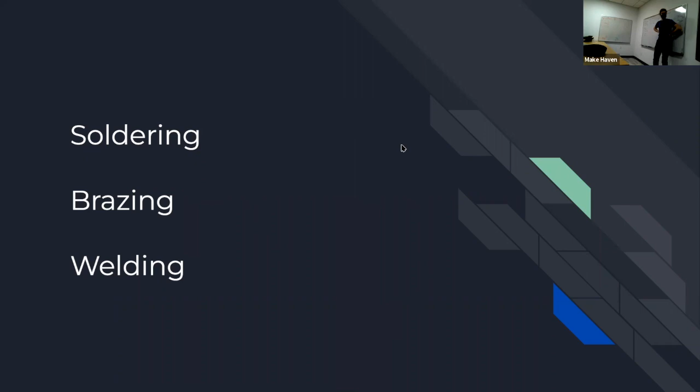Items are joined together by melting and putting together a filler metal, which is the solder, spelled like soldier, solder—it's a weird word. Putting that melted metal into a joint, a connection between two base metals that do not themselves melt at all. So when you're soldering, you're putting a metal glue between two pieces of metal that don't change. That's what soldering is.

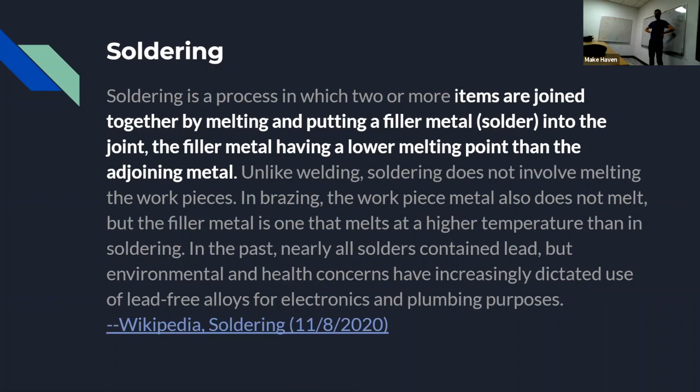It can happen for a lot of different purposes, a lot of different things. You might solder pipes—you might have heard people talk about soldering or sweating a pipe together. We'll see that that's sort of in the borderlands, maybe almost for some pipes.

A lot of it that we're going to talk about is soldering for jewelry. So this is perhaps the most relevant type of soldering for what we'd be up to this week—soldering jewelry like you might see here. If you've got some bands, these are fire bricks, a little tiny torch, and then some soldering rod. You can also solder together chain links and other different things.

But soldering also applies to electronics up here. And so spiritually, these are all really similar in that you have a base material that you don't want to have melt at all, and then you put molten metal in between to make some sort of connection.

My brain, that is coming from my physics background, is thinking about soldering like this every single time, just because of electronics. And in that case, you really don't want your base material to melt because it's like a transistor that you need to have operational. So you don't want your base things to melt at all.

Whereas in jewelry, sometimes it can be okay for the pieces to be a little melty, like they won't break if they melt a little. But usually they're very precious metals and you don't want them to discolor, or there's some reason why you want them to stay exactly as they are. So soldering is a great purpose for that.

This is the coolest of the processes that we're going to look at, as in actual temperature. The soldering irons for electronics downstairs, I was just looking at them—they're only 700 degrees Fahrenheit, which is hot.

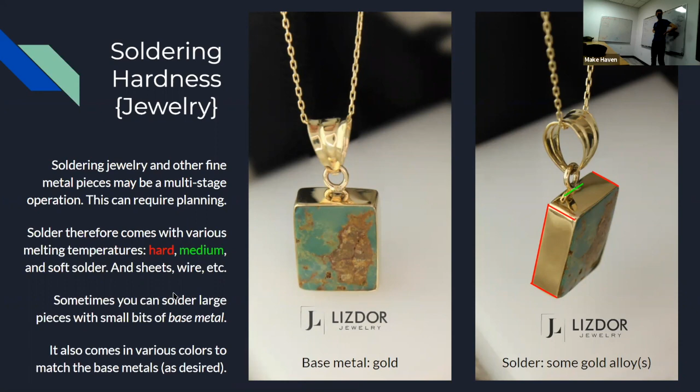I made a little message channel for a few people who had expressed interest, and Lior said, like, then 2 days later, oh I just started making the video for it right now. Part came in. So if you want to make metal castings, it is now possible. It's really cool, and it's a copper part, so he did it with molten copper, which is really cool.

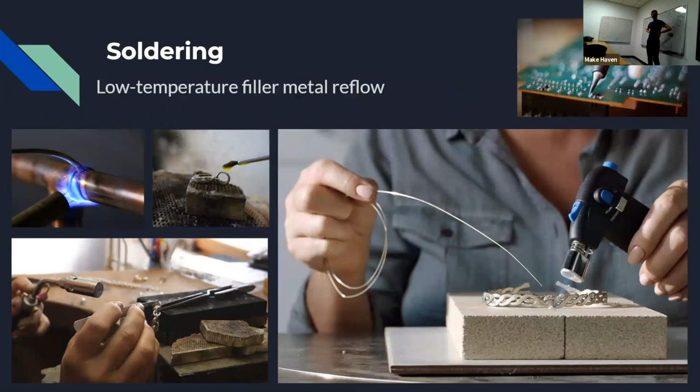Metal items are joined together by melting and flowing a filler metal, so really similar. The filler metal still has a lower melting point, but usually there's a flux, and you're getting really close to the melting point of the base metal. So the base metal may melt a little bit too, but you're really, really close. This is something you can consider.

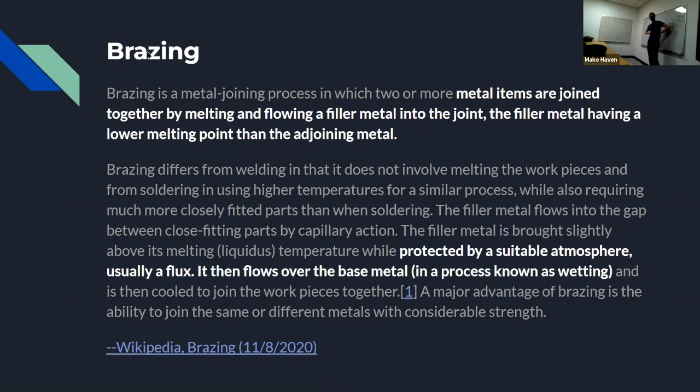Copper is sort of on the border for melting points, but brazing is often used with aluminum tubing. Aluminum can be brazed pretty easily in a garage at home with a torch. Aluminum has a lower melting point overall, so you can get aluminum brazing sticks pretty commonly at a Home Depot or Lowe's, and then you can get things to go together.

Brazing is also really easily done on a conveyor belt, so it's not an uncommon manufacturing process where you can have a filler metal flow between two pieces, as opposed to big robotic welders with a giant robot arm laying a weld. You can pass it through a really hot oven controlled for temperature, just below melting the base metal and just above melting the brazing metal.

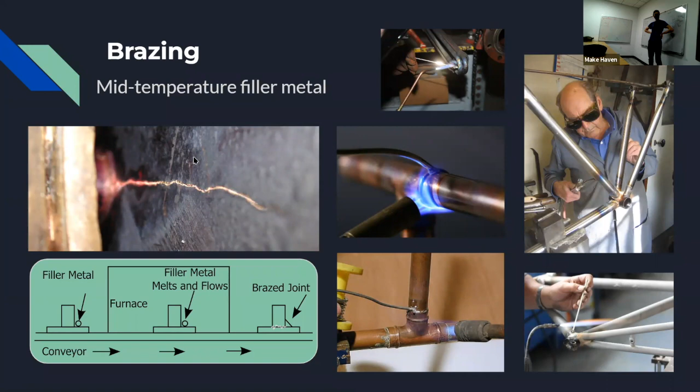between soldering and the next one, which is welding. Welding is the one that has the highest heat. It melts parts together, allows them to cool and fuse, sometimes with a filler metal and sometimes not, but it always requires melting of the base material.

So when you're welding things, if you weld two pieces of steel together, not only might you have some filler if you use MIG, you're also going to melt the steel that's there. All of those are true. And if you do oxyacetylene or forge welding, you may actually make a weld without needing any filler material—they're just so hot that they fuse together.

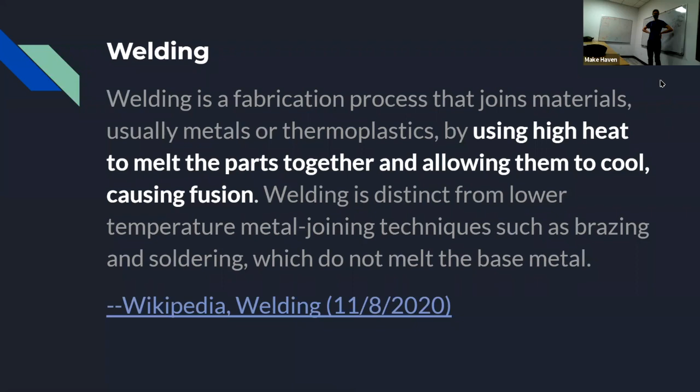You were trying to forge weld just a bit ago. Yeah? Should have brought my first attempt, it's probably still pretty toasty, I would guess. Later, I quenched it. I accidentally melted steel earlier, which isn't something I've ever been able to say before.

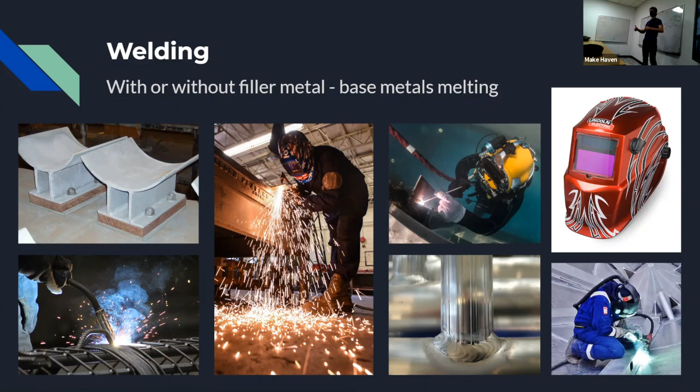Is there a start with MIG and you graduate upwards, or can you go straight to TIG welding? Is it better to?

MIG is by far the easiest because you just press the button and it happens, like a hot glue gun. Yeah, I just don't think well, and it's not... so you're asking good questions.

There's a whole range of different types of welding. There's MIG, where it comes out of the gun, it's a hot glue gun.

Then TIG, where there's a TIG cup where you hold a thing that makes an electrical arc to what you're trying to weld, and at the same time, in another hand, you're pushing in the filler material. So for TIG welding, you have things to do in both hands, so it's a little more complicated.

Pedal the control, a foot pedal often. Although I think ours has a finger button, so you have two hands and a button to manage all at once.

So that's a step up. And then there's oxyacetylene, which is just oxygen and acetylene, 2000 degrees of fire that you point right at the thing. You may want to put a filler in, but that's hot enough for most metals that you can just melt them until they're melted together.

And that works fine. It's also a good way to cut through the metal if you just want to sort of melt them enough that you can make a cut.

I think it's one of those where there are people who will only do hand woodworking, and there will be people who say if you can't oxyacetylene, what are you doing? So it falls into that same sort of camp.

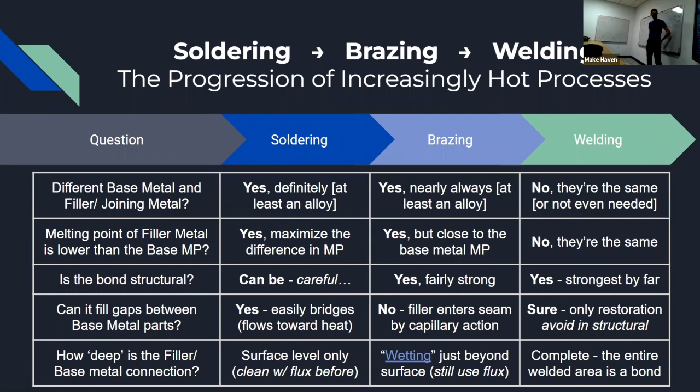There's some subtlety, but the simplest way to think about it is soldering and brazing have a fair amount of overlap, but those are sort of lower temperature and they both require a filler. Welding is hotter and more, it's the only one that melts the base material, so it's sort of separate from the other two.

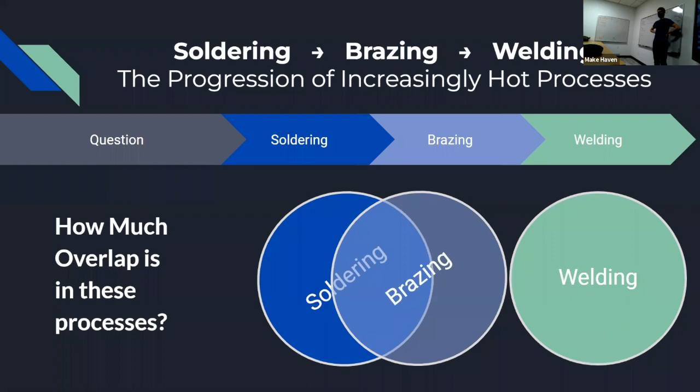But making a chain is another thing you can actually do. It takes some skill, but I watched Lisa, the facilitator, just manifest a chain right there in front of me.

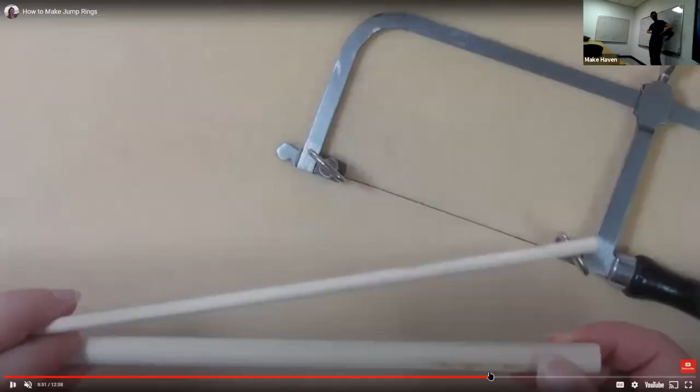There are a lot of different ways you could do this, but it's really possible to do even with just a stick of wood. You can do this without needing the jewelry shop at all, but it's really nice to be able to use some of those tools, even if you just grab a saw.

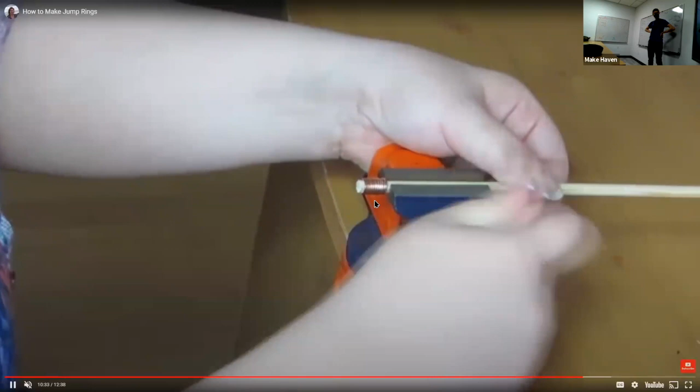Oh, and this is the process I saw Lisa do. You just take a coil, push it near the end of a dowel, and then cut at an angle, so you're really just cutting it in half, and that gives you your jump ring. So if you wanted to make chains like this, it's pretty approachable to do. It's a very 'you can make it happen' sort of thing.

A big chunky chain can be a lot of fun. This is one of four videos that cover these processes.

You can do all different kinds of chain lengths. You can do these fancy loop and loop chains, or you can do wrapped wire techniques, which can be a really fun thing to pound into a wood piece.

This is as easy as taking a wire, putting it in a drill, and spinning it, which makes it straighter, which is kind of bizarre. Then you take two wires and put them in the drill and spin those, and they twist usually in a really nice progression.

Although they found a way to make like an 8-minute video about it — it's, you know, YouTube content. But in any case, making jewelry like that is really fun and approachable, so I'd recommend those videos if you're interested.

Tempering is a cool process. In Slack, in the Foundations channel, I shared my video feed on YouTube, the kind of thing I watch when I get home and sit on the couch for ten minutes before getting up to make dinner. Today it was this Old Tony video, 'You'll Shoot Your Eye Out Kid,' where he goes through the tempering process, showing how you temper different music wire and different materials. So if you want to see tempering and annealing, it's a really fun way to see it.

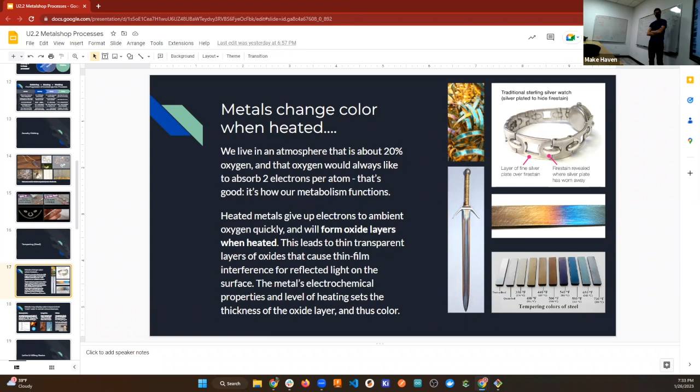It's an interesting dynamic in metals, but probably most of us won't be too deep in those weeds. But it's good to know, good to look at. And if you happen to be doing something where you make metal chips like this, you can get real fun colors and you can tell the temperature they were at as a result.

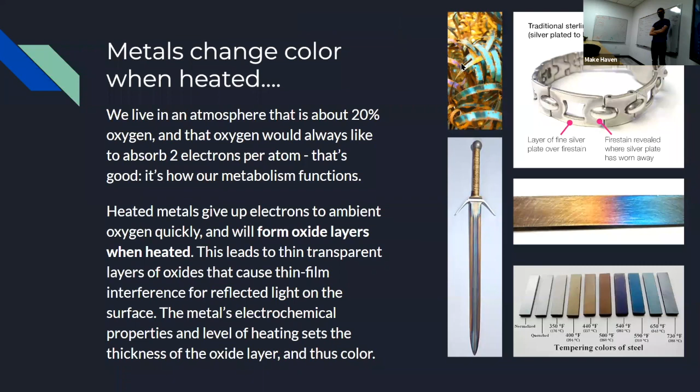So there's a bunch of reasons why metals have colors, and I want to say these out loud more than anything. The first one: if you get a metal glowing hot, that's something called black body radiation. It's a fascinating science phenomenon where things get so hot they'll just start glowing. And it turns out, in case you wanted to know, the sun is an example.

The sun is not on fire. It's a big glowing hot ball of gas, in case you wanted an astronomy lesson to go along with it. In order to be a fireball, it would need to have oxygen so that it was burning. Instead, it's just glowing hot hydrogen and helium, glowing white hot, which is its own whole crazy story.

But in the metal shop, you probably won't see it until you weld something. And then when you finish the weld and pull the goggles up just a little too early, it'll still be sort of glowing orange, red. And as it cools off, it'll stop glowing. So metals can glow when they get really hot.

You were using the induction forge, doing some forging. There's a shield that you want to wear that's I think tint 3. There's tints to protect your eyes of various grades. So welding will be like tint 12, and this is just 3 to take the edge off because it gets so bright.

Before I put the shield on earlier today, I was getting the spot in my vision, like if you glance up at the sun. Which can be bad for your eyes over time. So that's an interesting thing.

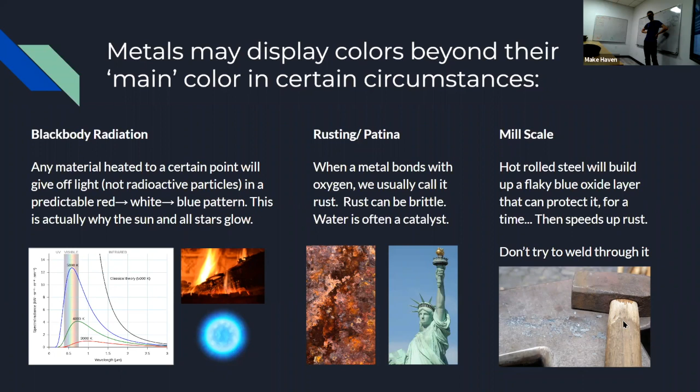Mill scale is a thing - if you're getting hot rolled steel, you might know if you're getting into that, it's got this bluish appearance on it. Or if you put it into a forge and get it hot, it'll form on the surface. If steel gets really hot, you get these blue, solid, multiple-layer thick oxide layers. A blacksmith is where you'll see a lot of this. If you go look at our anvil in the metal shop, there's some mill scale near it, but it protects the surface. A lot of times, like the steel mills I used to live near in Cleveland, you would see the metal with mill scale on it, because it does prevent rusting until you knock it off, and then it just starts to rust like mad. But it's a really good way to work - you just don't want to weld through it, it's not good for that. If you start working with the anvil and forge, you're going to totally notice mill scale, and that's just part of how it works. It's a light blue color.

This is where things like the screw got defined. They did exist before, but shortly thereafter they were standardized pretty quickly, and that let us have more precision in what we build. We're in New England, you can see lots of old wonky houses built in all sorts of ways that look crooked and bent and strange, which is fun. Those were built without as much precision as something like the lathe would bring. Construction now has much more precision baked into it, so a house built in the 80s or 90s won't be nearly as whopper-jawed as one built in the 1700s. That's an expression of the amount of precision we've had in our tools and how well we can build things to a higher quality now.

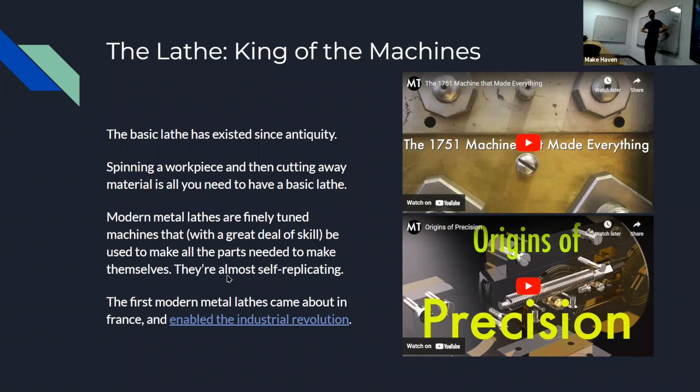You can use them for lots of purposes: to put threads on things, to make different size spindles. But basically, the lathe is all about spinning materials. Using this tool is a lot of fun, and you can make a whole lot of things with it. But there is a very long class for it.

And then with the big knobs and dials on the front, you can move this thing around and it'll make the cuts for you, because the forces on it are so extreme. You do not want to be holding the thing in case something goes wrong. So the metal lathe is a really useful tool if you want to make stuff.

Taking that and sort of spinning it up on its end is the Bridgeport. The Bridgeport machine—here's one of our two that we have. Instead of spinning the workpiece, they spin the cutter. So the cutting tool is a spinning piece, and there's a whole range of what those cutters might be or look like.

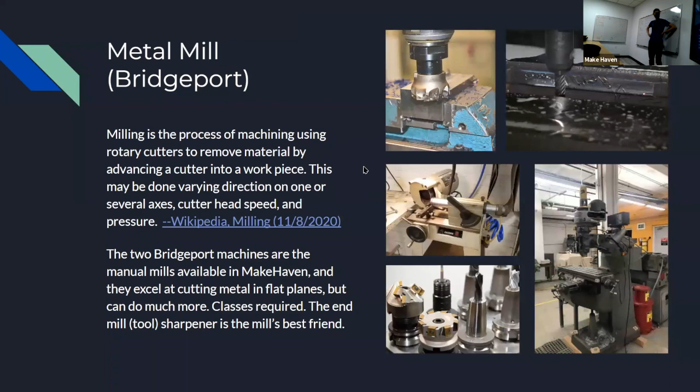One thing about them though, if you're running a machine shop, is you can make a whole lot of stuff. Like, here's an end mill sharpener. If you get really into it and you want to keep making things and your end mills get dull, you can sharpen them back up again. But this is useful to look at just to sort of see.

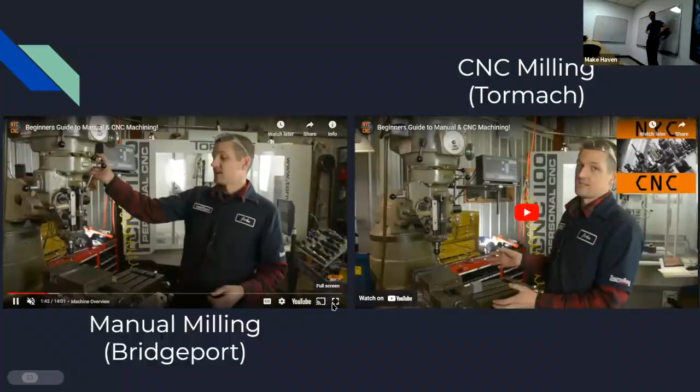I'm just going to show this muted—this is the same video twice. I would really recommend this one. We'll do this full screen. Here's sort of the Bridgeport doing its thing.

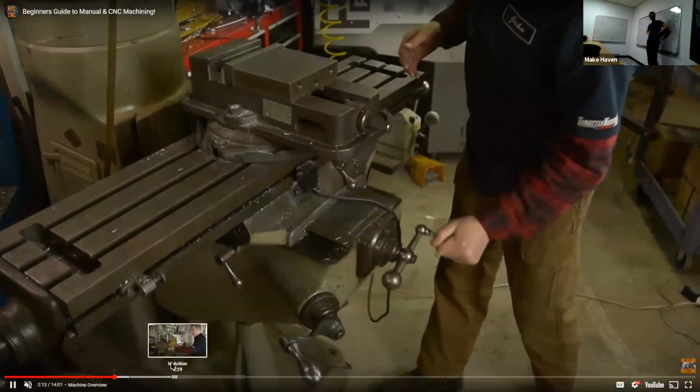You can see it looks a lot like a drill press. There's this quill, you move up and down. Here's the cutter, and as you go through, a few knobs will move things around. So instead of the drill press where you have to manually put the piece of wood where you want and then drill, the milling machine or the Bridgeport lets you manually move it around with knobs and wheels so that you can control it.

And up here, this thing that's not turned on for him is a digital readout, so you can see exactly—and it's measuring as you do it—where is it located, how's it positioned. If you get really good at using one of these DROs, you can be very precise with one of these machines. Prior to the CNC revolution, which happened somewhere in the 50s when they started turning up, people just got very good at building these things.

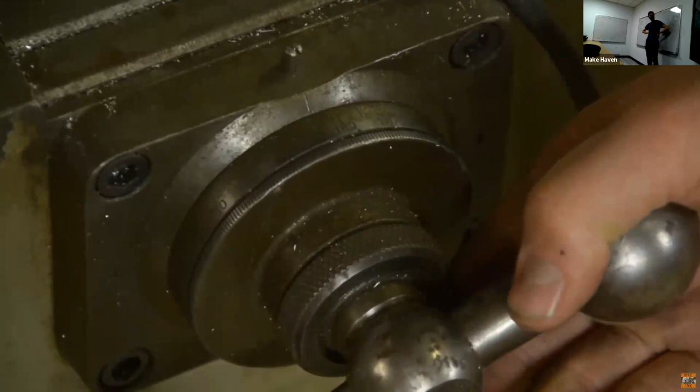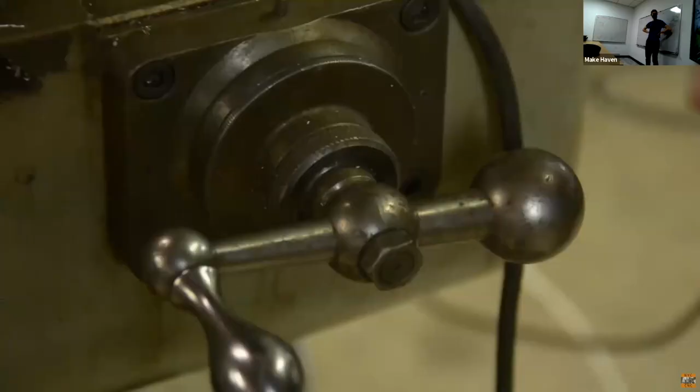So in World War II, this is how metal parts were made. Most often, people just learned how to do this, and they would be able to crank things out of these sorts of machines, building all sorts of stuff. And yeah, they're Bridgeport, like Bridgeport, Connecticut, where they were made, which is kind of fun. So there's all sorts of different ways that you can do it—you can see here, here's the DRO.

It's able to read with great precision based on the movements you make on the inputs, so you can make really accurate motions with these. It's definitely a skill to learn over time. It's not something you can hop in and know how to program. You've got to learn some of the details of how to do it.

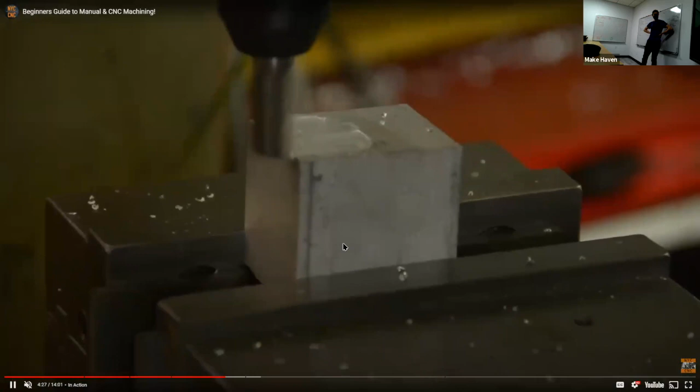You can see it's just slicing through that piece of metal. That end mill is able to make cuts and get really good detailed cuts through pieces of metal that other machines would struggle to do. But it's kind of fun to watch.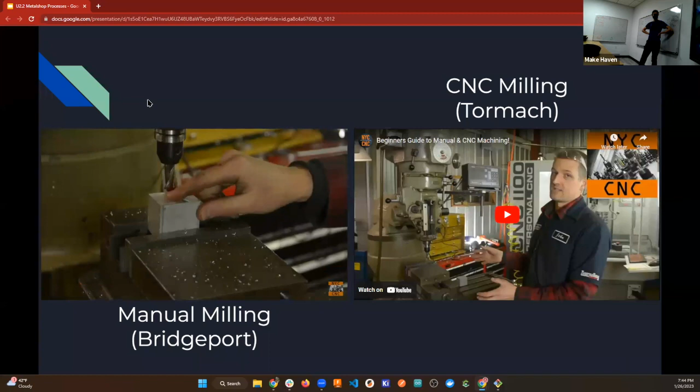I would doubt it, I think, but maybe. Are you going to Google it? Oh, thank you.

This is just where they're manufactured, like Toledo, Ohio, close to where I grew up. They're famous for scales, I think they just made good ones. They didn't invent the scale, but every country has their own famous brands of them. I think a Maho is a Swiss made one, maybe. There's different brands from different countries, and they're very proud of those heritages.

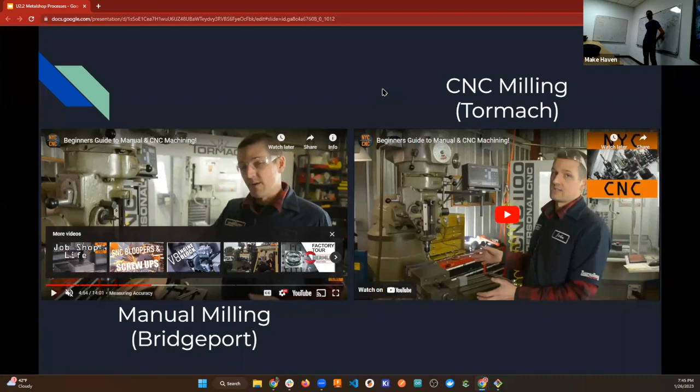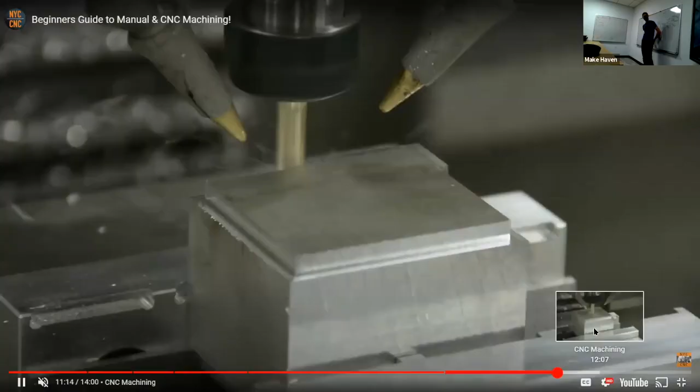The CNC is sort of the spiritual successor. So you'll see in this half of the video that a lot of what's going on feels the same. There's a vise, there's a table that moves around, and it's doing basically the same job.

The difference is that this is controlled by a computer. So instead of you needing to be good at turning those dials, look at how fast it made that turn without a pause. This is now controlled by a machine, and you can get very precise things, like this little spiral down into the metal. That would be just about impossible to do on a Bridgeport. You'd have to be moving things with three hands at once to do a downward helical spiral.

Fun fact: the milling machine was created by Eli Whitney in New Haven. And then the Bridgeport, specifically the Bridgeport Metal Goods Manufacturing Company, was organized in Bridgeport in 1909 by a Danish immigrant. Just saying how much I love the Danes.

So in what situations would you want regular hand Bridgeporting versus the CNC? Basically nowadays there's a lot of stuff you can only do on CNC. Like Corey was saying, doing a downward helix into a piece, you really can't move two axes at the same time with any precision on a Bridgeport. So making cool shapes with curves is really something you can only do with the CNC.

That being said, I think a lot of machine shops still will have a manual Bridgeport and a lathe, because if you just need to size a piece of metal, a lot of the time you need to do one cut to make this thing flat. A Bridgeport is a quicker way to do that than setting up on a CNC machine a lot of the time. And I think industry has really moved towards a machine shop being a whole room full of CNC machines big enough to walk into.

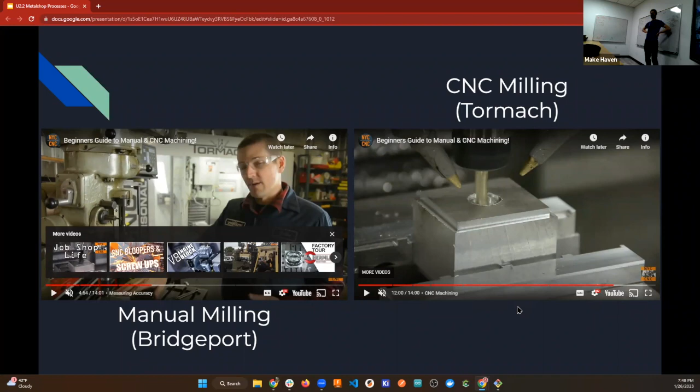And especially living in Connecticut, you should be able to find a used Bridgeport if you're really looking for one. I believe we have one for sale. Yeah, we do actually. Yeah, we have three. Third one is, yeah. So if you wanted to get one, you can, I know a guy. It's Leor. That's the guy.

Would you want to switch out the drill for different materials, like steel versus wood?

That's a great question. We have 3 active CNC machines here. There's 2 in the wood shop, the Shapeoko and the Gerber, and those are for wood. There's also the embroidery CNC, but that's a different beast. So 2 in the wood shop, and then the metal Tormach one is really more for metal.

Acrylic you can cut on the wood one. The metal one, the Tormach, has a capacity of 8 inches. It's not big, and it's meant for small metal pieces. There's a branding iron with the MakeHaven logo we'll show you after class. It's good when you have a small part and want a nice detailed thing out of metal. If you want plastics or wood, that's more in the wood shop. The tools are often the same cutters, but the control and how you interact with it can be pretty different. In terms of how difficult the machine is to use, they're all about the same—once you learn CNC, they're all pretty similar.

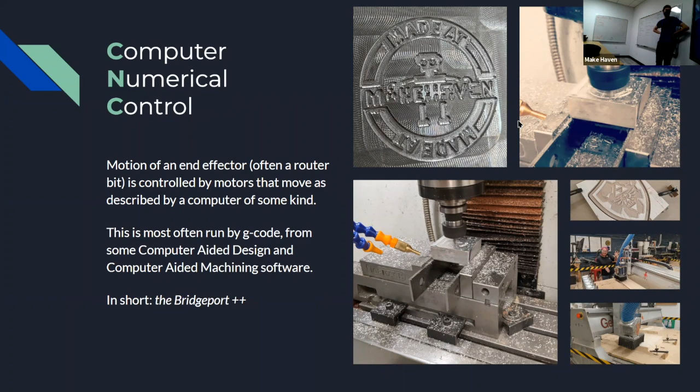Other machines use G-code too, but we don't need to talk about it as often, like 3D printers. The laser and vinyl cutter use some weird version of G-code that's slightly different, but it's all just commands that move the machine around. So instead of turning those knobs by hand on the Bridgeport, the CNC does it robotically. The water jet also does it robotically - it uses a slightly different G-code-y thing, but it uses that OMAX software to manage it, so you'll never need to see the code or touch it, which is perfect.

In this process, let's say you have a thing that you want to CNC, you're going to do a whole set of things. You're going to have the idea, you might need to 3D model it, then turn that model into toolpaths, which is a process. So designing it is CAD, then there's CAM, then you export it to G-code, then you home the CNC, then you run the CNC, and then you clean up the work area. There's a whole series of steps.

But if you ever pay close attention to Chris, he might just have an idea, and then an hour later he has a thing. You can get very good at that process - it's just a whole set of steps that you have to go through. Like the metal things that we passed around last week, I'm just saying, boy, it'd be really nice if we had example metals. And he's like, oh, I got this little piece of titanium. Then 25 minutes later, he showed up with titanium, the TI engraved into the top of it. Because that's just how he works. So you can get really good at it, but it takes some practice.

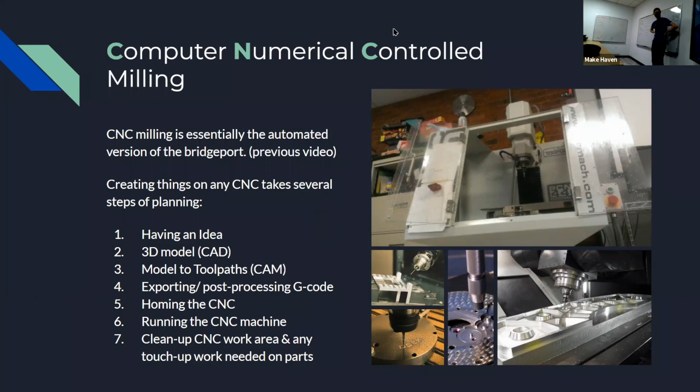Water jet cutting - lots of you already know about the water jet, which is very exciting. It's an ultra high pressure water and sand combo - there's the water and the garnet, and you can cut through just about anything.

We've got some cool examples that we're going to look at later today during show and tell. We cut some glass throughout the week, there was some metal that was cut, and other things you can cut - ceramic tile, an apple. There's a water jet channel on YouTube literally dedicated to putting weird things under the water jet and seeing if it will blend, videos from long ago. The water jet channel is fun - they did a rubber band ball once, that was a good one. A frozen pizza too, I think.

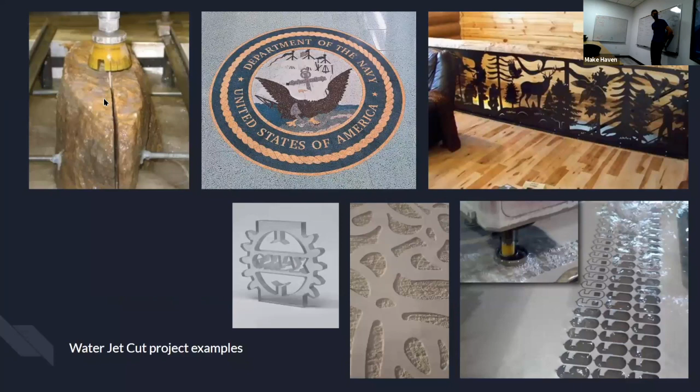Here are examples of things that you may water jet, like a raw stone - you can totally blast through stone like this, it just takes longer. If you're going to do something very tall, it takes a long time. If you want to have a nice inlay in your front entryway, you can do that. If you really want your decor to yell Montana, you can do that.

You can cut through glass, stone, sheet metal works really well, plate metal works really well - all of those different things cut really nicely on the water jet. There's essentially not a limit to what the water jet can cut, it's just going to go slower or faster based on the material and how much it resists it. The other thing is that if you have a very brittle material, there's a lot of forces, so you have to think carefully about where and how it's going to be held.

The water jet has this big tank of water. As a general rule, try not to put your hand in there. You want to make sure while you're using the water jet that you don't have to go fishing afterwards, because one, the water is kind of gross, and two, who knows what sharp pointy things are down there.

Every so often if you scroll through the water jet channel, you'll see strange things Chris finds at the bottom of the water jet when he drains them. I found a peace sign today. Probably quarterly the water jet gets fully drained, but most of the time I think it just stays full of water.

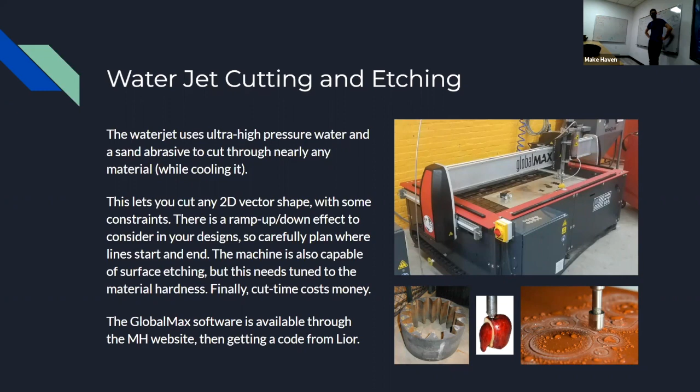For that Navy SEAL design, like what would actually cut? These are all different marble or tile that were cut on the water jet, and they all just sit really, really tight together. Each color you're seeing was a different original starting color of a piece of stone. So there was some sort of orange stone, a white stone, a gray stone, a brown kind of stone, and each of those were cut into their geometry. Somebody had to plan out the design.

Department of Navy, that part, the actual letters, into the blue. So first they did the blue and then it just fits, cut that out. They cut the blue out and then pieces fit, like a wood inlay, mirrored a negative through the whole thing.

You said when you're drawing, it's so hard to do. You said it runs on G-code, like that's how it works.

It does, and let me pull up the Omax software that I have installed. So when you get badged on the water jet, you also learn how to do the G-code.

I didn't like designing it that way. I did my design in Inkscape, and you get started, then exported it.

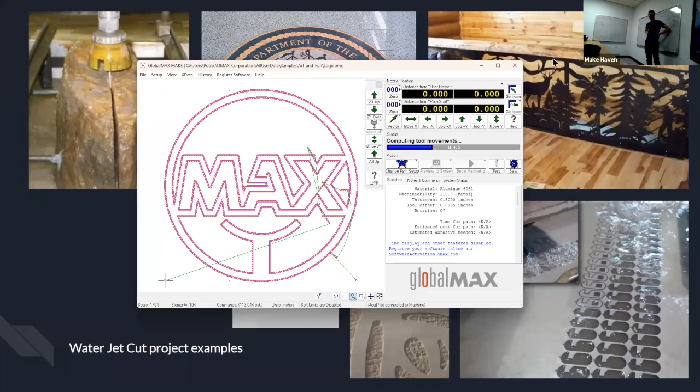So here's the Omax software, and if we look at this area over here, the design is right here, and then the machine knows that the water jet is going to blast out this pink area, so it does the cut. You have to tell it this is my waste area and this is my cut area.

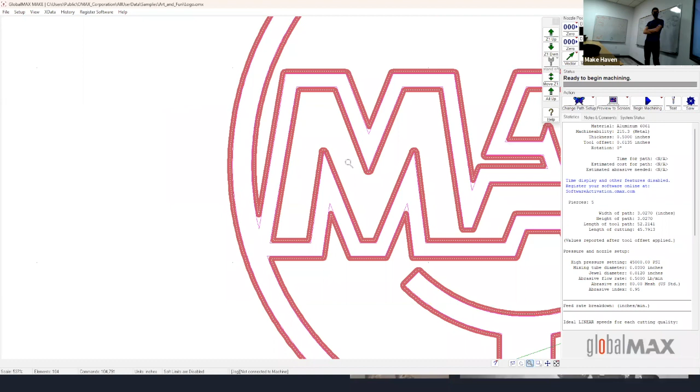Thinking about the Navy SEAL on the floor, somebody would have had to make that design, probably with a set of vector lines, and then on the blue you'd have different choices about what's waste. Like here, it's clearly making things that are bizarre, where it sort of pokes into your design, but anywhere it pokes in, those are waste areas of the base metal that get cut out. So there's a lot of choices that go into how this is made.

This is sort of the CAM end of your design. The CAD end is different - I can do vector design, but the Omax software is still a lot of figuring it out and gnashing of teeth. In the design, you make choices on which side of a line you want the cut to be, or do you want to cut right on the line. Little micro choices like that really build up the process.

Those little micro choices of manufacture, that's what CAM is, computer aided manufacturing, and that's a process we'll dive into more. But if you really love the water jet, this will just be a thing worth dealing with, because you can make such cool stuff with it that you want to learn this process. And while I am not super great at it, it's because I haven't done it a lot. If you make 3 or 4 things on the water jet, you'll get good at it in just a few tries.

So Chris, you're saying like, I get it, I know how to turn it on, I know how to use it, I know how to click in now.

In terms of formulating my idea and getting it into there and figuring out one cut versus another, Chris can help with that part. And there's tutorials online too, so you can watch videos on how to do it.

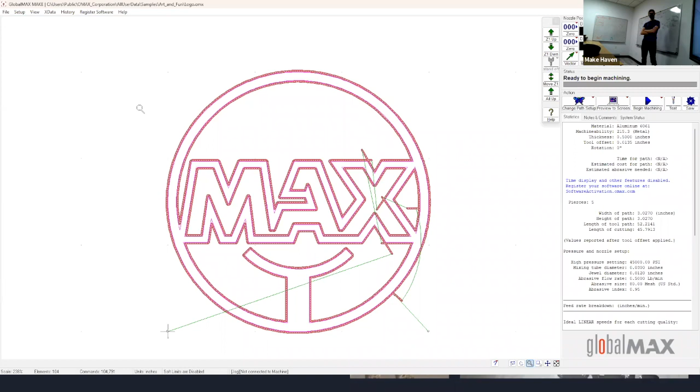Because all the pink lines are vectors, the thin pink lines are vectors, and the rest of it is design stuff. So is a vector just points? The vectors are just like the shapes, the shapes of what you want to have. And then there's choices around how are you going to make that shape happen. So there's limits and precision and things to unpack with that.

We have a CNC unit where we really get deep into the weeds with that. But it's fun, there's a lot of fun you can have with the water jet without ever really bumping up against that. Nobody's first project is going to be that Navy floor thing. But if you want to make this, like you'd honestly never bump into it if you made that handrail. Your design is basically going to work out in the way you want it to work out.

You won't have to think about the curve of your cut, it'll be very, very easy to do. If you wanted to make this thing, you won't care too much about the details of the curve. Or if you're making a straight cut through a rock, all of those details are gone. You just set it, go for 12 inches and take a half hour to do it. So it can be pretty simple, but if you wanted to get deep into the weeds, it takes some practice and getting there.

Can you design something on CAD software and export it to the Max? You sure can, that's a pipeline that we will absolutely be talking about more. There's a lot of software in that stack though, so you've got to really learn the pieces and put them together. But it is possible.

Okay, electroplating, electroforming, and chemical etching. We're going to zip through these together. These are fun, I don't think a lot of people do these, but they're really, really cool to see happen. I don't know a lot of people do them here.

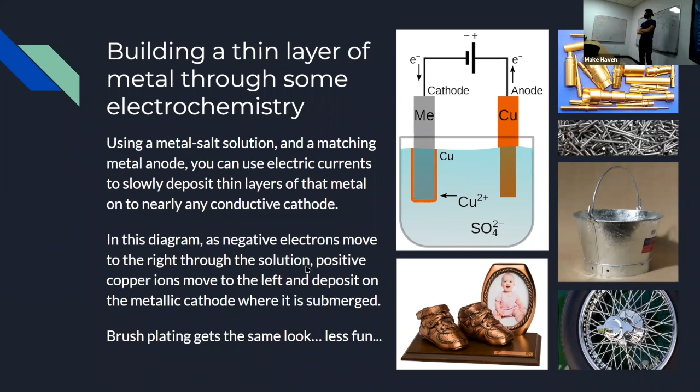There's a reverse version of this that gets rid of rust - this one right here. And so if you want to remove the top layer of something, it's usually called etching.

Make sure to put your channel ID. Yeah, your channel, make it merch is what you need to do.

So there's a lot of really interesting processes, but they have to do with the intersection of the chemistry of a metal and then some electricity to encourage atoms to move in one direction or the other. If you really want to get into this, there's some really cool details you can add, but for us it will just be following the instructions someone else has laid out. If you're a metallurgist or a chemist, you may imagine new processes, but otherwise follow some instructions. It works great - as long as you follow the instructions right, it'll just work, which is really nice. It's dependable - atoms are just going to behave the way they're going to behave.

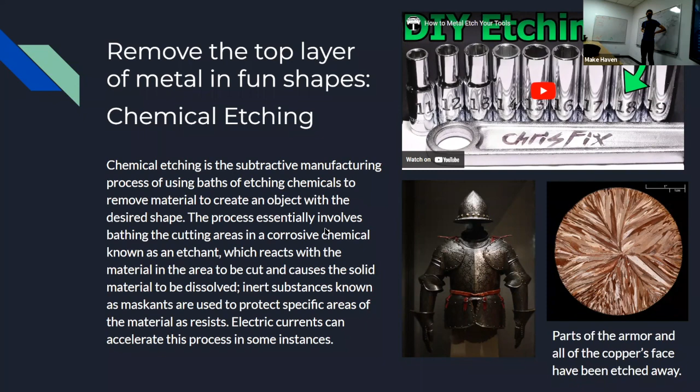So we made it through all of the processes, and we can definitely talk about more, but mainly this week we want to talk about different sorts of projects that you might want to do, or getting more badges is a perfectly fine way to go. We do have some grab bag ideas that we realized we have from previous years, and if you wanted to try and figure out some more different things, there's sort of groupings for these.

There's like super easy metal table legs, or wind chimes from pipes, or copper wind chimes - there's a bunch of different interesting ways. This is also a longer document for other ideas for units that we have and don't have collectively. It's a bit of an old document, but that's the right link for us right now. But if you're interested and want to do things, I would say go for it. But really, I would say try doing some welding if you're still looking for badges to go after and you're a little unsure about what to do.

But that's where we're at for the week. The big thing is we'd like you to still continue to get badges, and if you want to work on projects, we can totally help you. I think the show and tell that we're about to do is going to be really neat to see what people have been up to, and it may inspire you to make your own sorts of projects come to life from what's been going on.